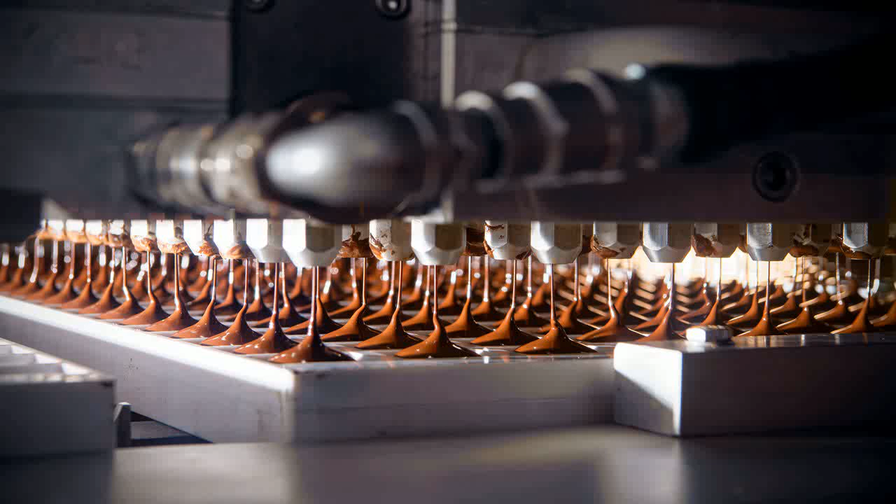Hello and welcome to the SKF webinar where we'd like to talk to you about managing lubrication in the food and beverage industry.

It's said that the 7 most expensive words in business are "we've always done it this way," and we feel that this can be applied to lubrication and relubrication within the food and beverage industry. We see the need for people to consider over-lubricating, increasingly relubricating machinery and assets, and this is largely due to the contaminating nature of the processes themselves, particularly regarding cleaning, high pressure rinses, and chemical cleaning for hygienic purposes that goes on within the food and beverage industry. This leads to what we would consider to be endemic over-lubrication.

So let's discuss the importance and the impact of lubrication. First of all, if we look at a typical maintenance budget, it's said that only between 1 and 3% of that budget is taken up by lubricants themselves. However, the lubrication act itself can have a very profound impact on company key performance indicators and on costs. It will impact output, it will impact cost, and it will impact compliance.

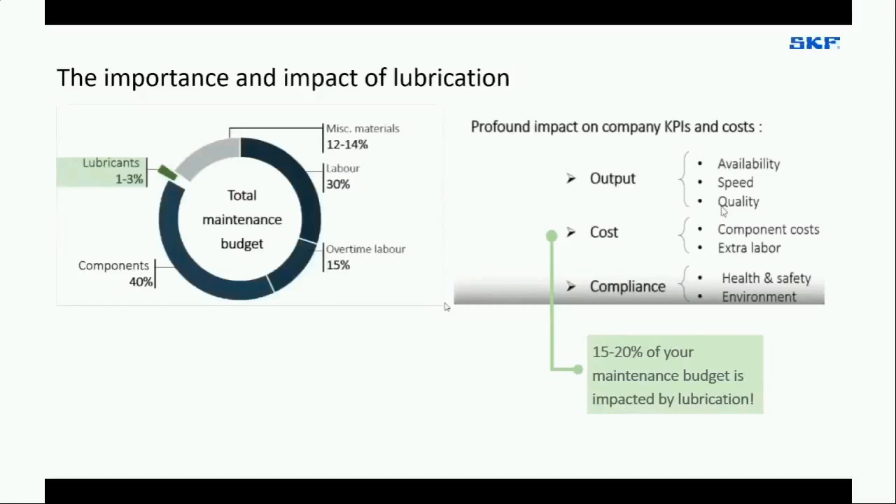If we look at just one of these facets in more detail, that is cost, the companies we work with, both globally and locally, tell us that probably between 15 and 20% of the typical maintenance budget can be impacted by lubrication and by poor lubrication practice. So let's look at this in a little more detail.

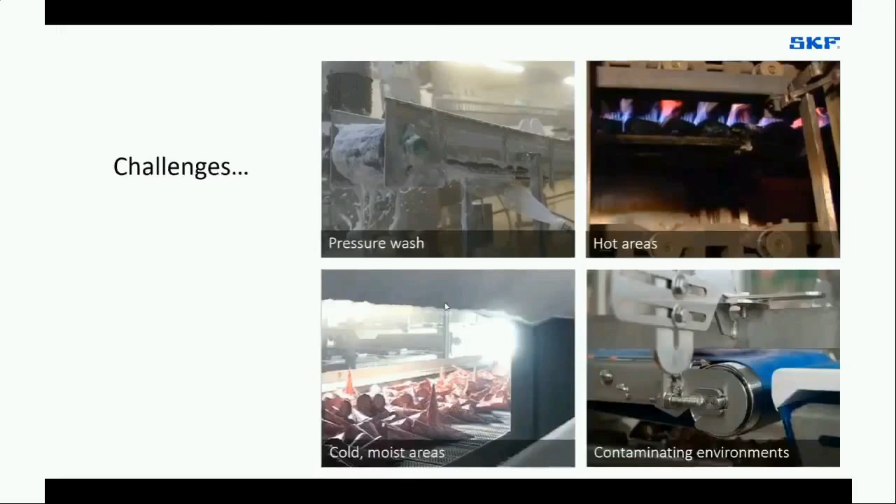What are the challenges? Why is lubrication such a big issue? That is really around the environments that we see within food and beverage production.

First of all, the cleaning that is necessary for hygienic purposes. This involves high pressure rinsing, the application of penetrative chemicals, which are actually solvents in nature, quite often used to dissolve fats, but that means they also impact on lubricants as well.

The application of heat in many of the processes—these can be temperatures of around 180 to 230 degrees centigrade in some cases, way beyond normal grease technology. This has a big impact on the relubrication process, the amount of relubrication being conducted.

Even cold areas where we remove heat, such as freezing applications, can have a big impact on the lubricant within a bearing, the need to relubricate, and the performance of the bearing itself. And pervading all of these environments are, of course, overall contaminating environments from the nature of the elements being used in the food manufacturing process.

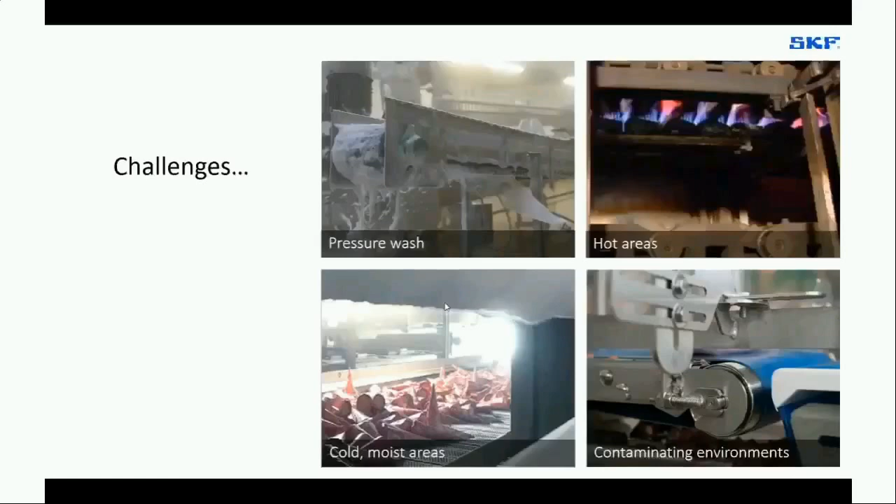So what is the best lubrication strategy? We look at it in 3 elements. First of all, we consider: is it possible, by the use of the correct technologies, to completely eliminate the need to relubricate bearings within rotating equipment?

If we still need to relubricate after that consideration, how do we minimise the amount of relubrication going on and the volume of lubricant used during that process? And finally, how can we optimise the relubrication process? How do we make it safe for people, for the environment, and for the product that's actually being manufactured?

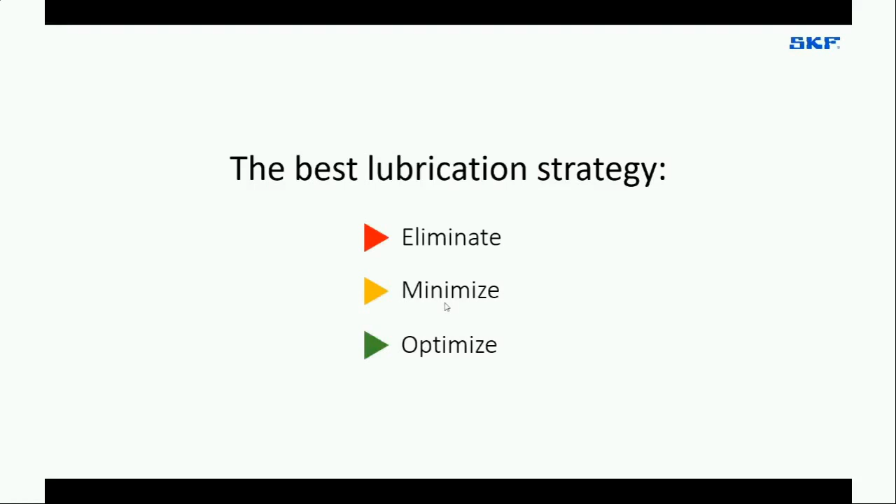So let's consider each of these in turn. First of all, eliminate. We would say to customers: we want to consider whether we can eliminate the need to relubricate, for example, ball bearing units on your conveyors.

And the response quite often is people look at you with panic in their eyes because they see how unclean the nature of the application is, how aggressive the cleaning involved in the hygienic processes are, and they say we have to re-grease the bearings. At least after a hygiene clean, we need to replenish the lubricant in the bearing because we know it will be impacted by the cleaning process.

So the washdown cycle in itself is often the root cause of over-lubrication. And it's a bit of a cycle, and it's very difficult to see how you can break out of that cycle. It's obviously necessary to hygienically clean manufacturing assets within the food and beverage industry. This is done by high pressure rinses, by the application of penetrative detergent solutions, and then further high pressure rinsing.

Because of that, people are often relubricating—as we would call it, relubricating to purge. So they're pumping grease into the bearing until the old dirty grease, and even water that's got into the bearing, is pushed back out. That in itself is a contaminating process.

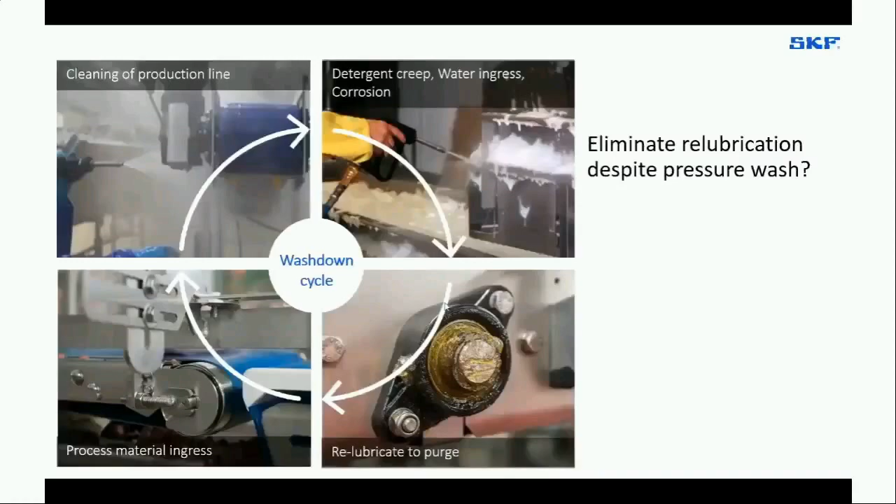So at this point, I'd like to hand over to my colleague, Fabio Falaschi. Fabio is very involved in the development of many of our food and beverage dedicated products, and he wants to go into much more detail about the mechanics of how these contaminants get into the bearing, how conventional sealing might be impacted by this, and then how sealing might be developed to better accommodate this contamination. So I'll hand you over to Fabio for the next few slides.

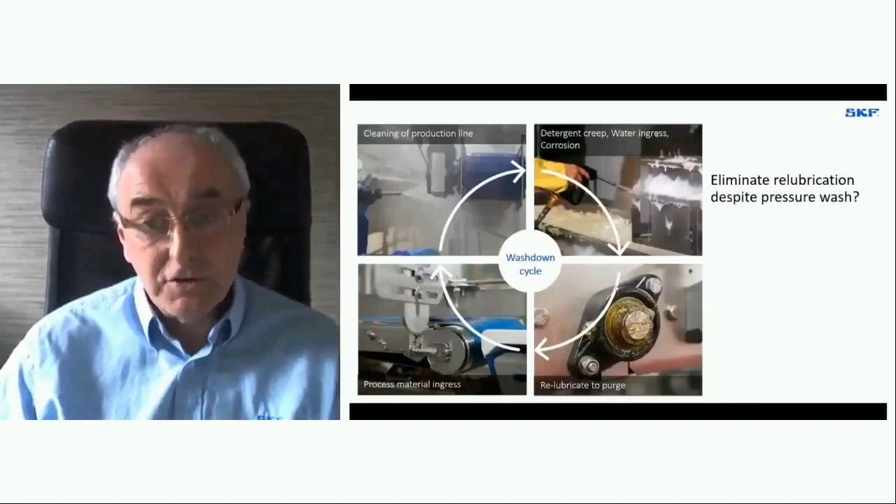Hello everyone, my name is Fabio Falaschi. I'm the Product Development Manager for Ball Bearing Unit in SKF. And today I want to talk about IP69. Is it really a safeguard?

IP69 is a very well-known and recognized certification on the market, and in fact we hear a number of customers asking about IP69 rating certification. Well, I'd like to bring you some insight from our test. So, first of all, let's take a pretty high-end bearing that is IP69 certified.

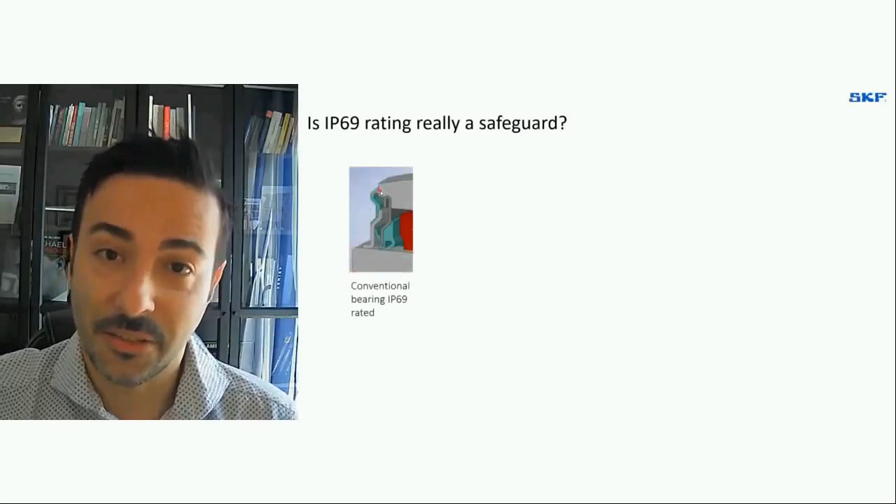Let's take also the test that we call the detergent droplet test, which we at SKF developed to try to replicate as much as possible what happens actually on the field when it comes to washing down with detergents. How does this test work? You see a little needle here, and this needle lets some detergent mixed with water drop into the bearing to see what happens to the bearing itself after this contamination. We run it at around 1000 RPM speed because this is an accelerated test, for a pretty long time - 500 hours. Then we want to check the status of each component after this test.

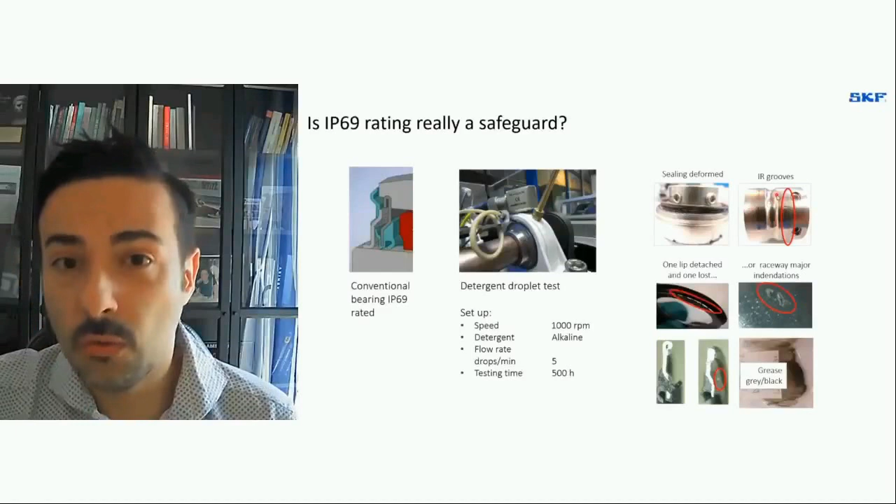Okay, so let's see together, one by one. Let's see the sealing. The sealing is very deformed, as you can see here, not really close, unfortunately, to the nice shape shown in the picture. And then we have these inner ring grooves here, made by these two contacting lips. The first time I saw this phenomenon happening, I was like, wow - I could not really believe that basically the rubber is able to machine hardened stainless steel. This is really incredible, but we have seen this over and over and over again, both in the field and in our test. This is really what happens when the lubrication in this area fails.

Then what else? We have the sealing system here, which has one lip completely detached, and the reason for that is that the detergent is so aggressive that it dissolves the bonding agent between the metallic shield and the rubber. And also, one lip is completely lost. I have no idea what happened here, but something really tough and strange happened to the sealing system.

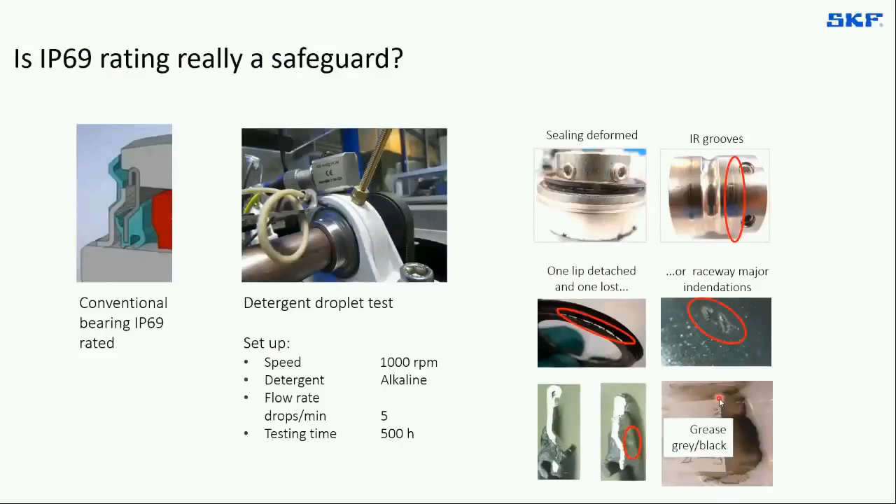Then we have the outer raceway here with major indentation, as you can see here. And I tell you, when you have indentation like this, the bearing life is not really much - there's not really much remaining bearing life here. And finally, the grease, which was originally white, is very oxidized, and you don't really want this kind of grease inside your bearing.

Okay, so what we can say here is that the IP69 rating, at best, is a safeguard against water. It's not a safeguard against detergent. Detergents are very aggressive and they trigger a completely different failure mode for the bearings.

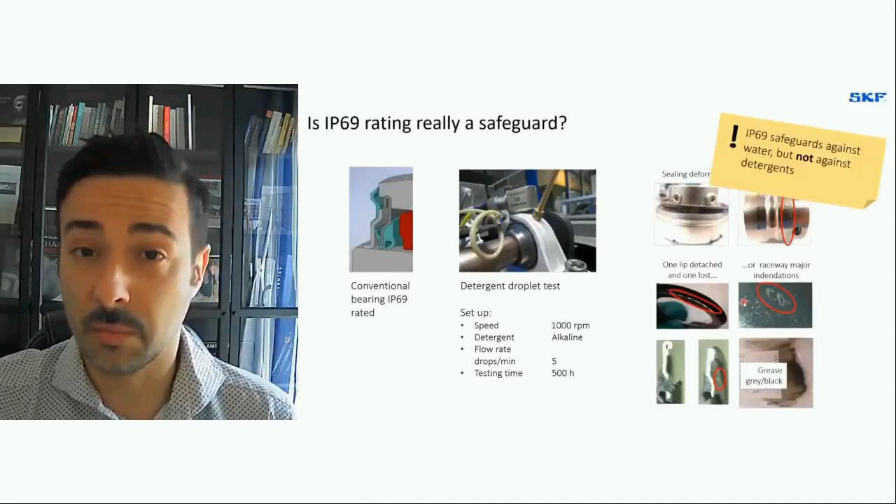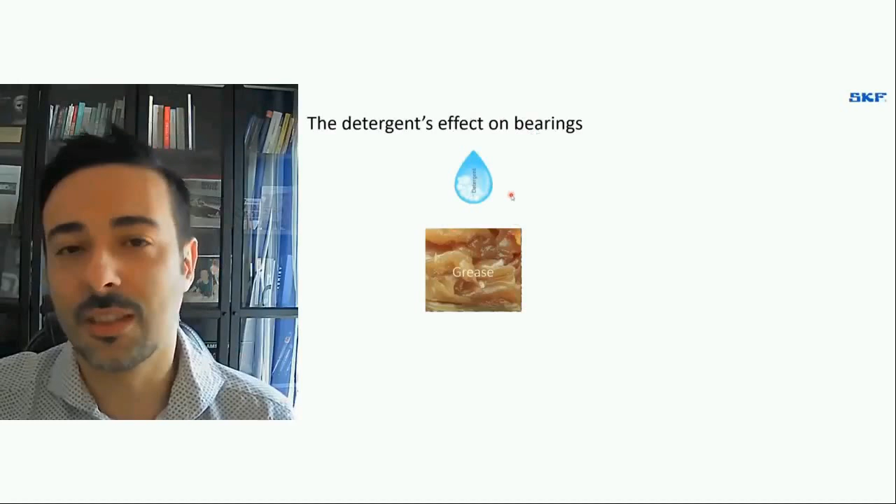So think about this. What the detergent is designed to do is wash down fats. And the grease, when it comes in contact with the detergent, does what it's designed to do: take the fat part, which is the oil, and separate it from the thickener.

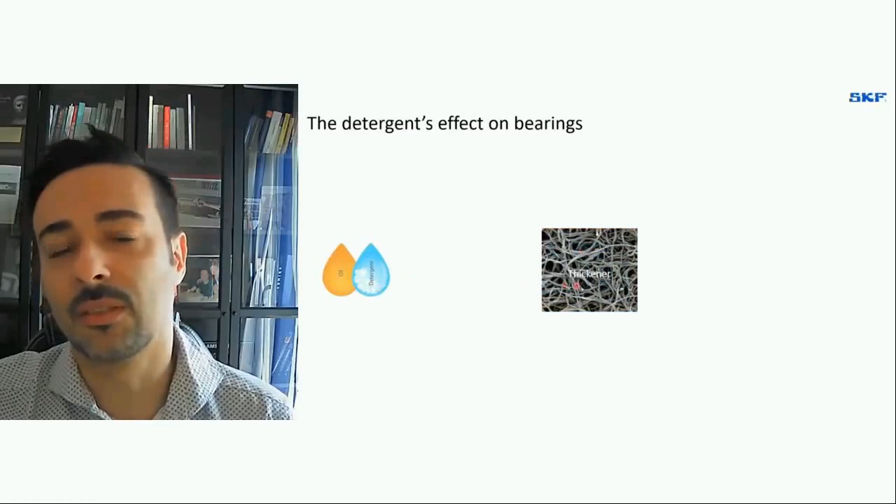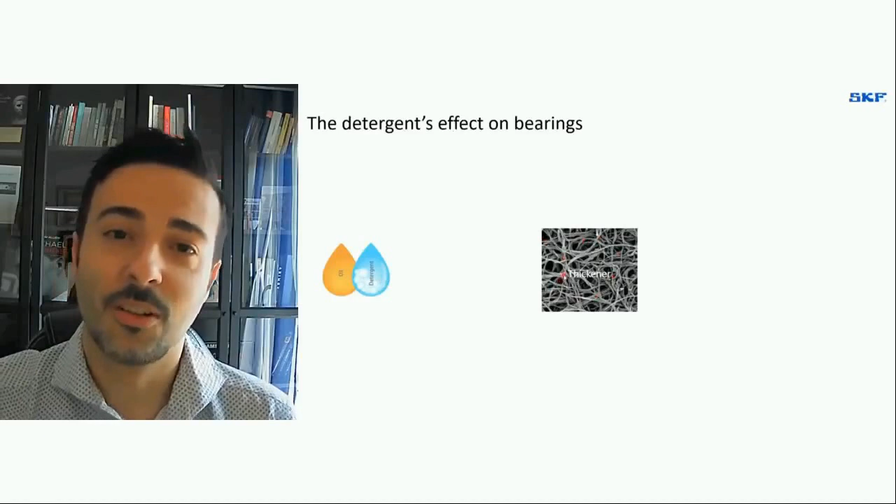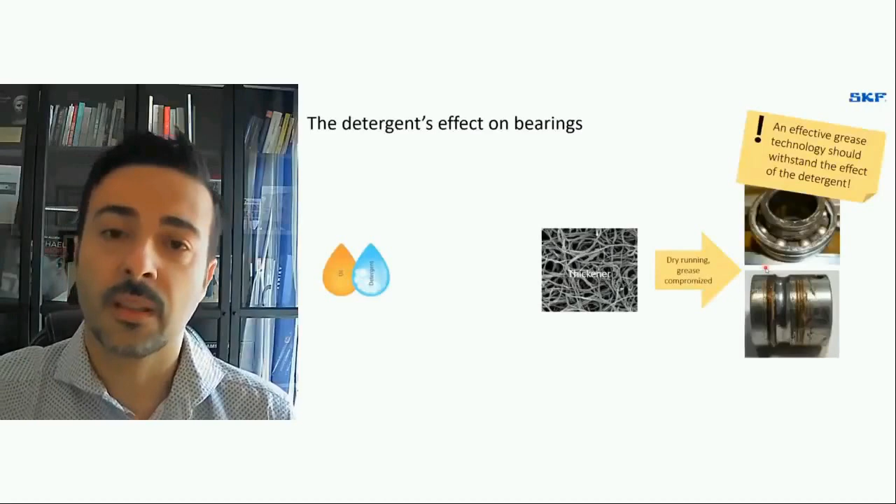Let's also speak about sealing technology. Let's take this solution with two contacting lips, one axial and one radial. And here we have a drop of detergent mixed with water.

Now the detergent is designed not only to wash down fat, but also to go through everything. This is the reason why the detergent has such a low surface tension. This low surface tension is the reason why you cannot in any way avoid the detergent going through your contacting lips. No matter how many you put, sooner or later, much sooner than later in my experience, the detergent will go through. So let's see what happens.

When this comes through the sealing system, it will get in contact with the grease. As we've seen before, the thickener and the oil will be separated, and you will have this sealing lip running dry. This will increase the friction, increase the temperature, and increase the wear of the sealing lip.

The only thing that will decrease will be the bearing life. So usually the standard perceived fix for this is you take your pump and you pump fresh new grease here. Doing that, you basically pump out the exhausted grease and you have fresh new grease here. Fine?

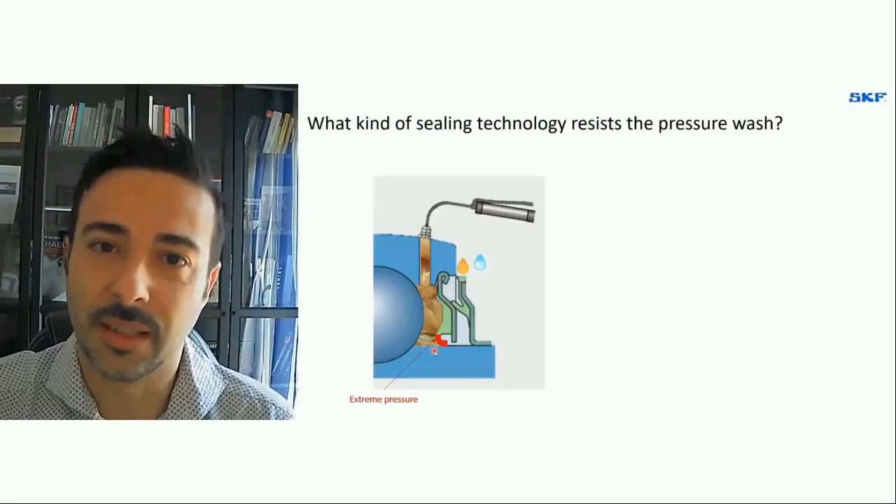Here you will have extreme pressure because this pumping procedure creates extreme pressure, and there's no way that after the procedure is over you can assess if this lip is still working properly or has been damaged. You just cross your fingers and hope that this will work. Is it really the best solution that we can have here?

Well, let's have a look at this. This is our SKF patented gutter sealing system. And we knew, as I told you, that there is no way you can avoid this detergent going inside, because it's designed to do that.

When you cannot actually avoid it, we say, okay, if you cannot beat them, join them. So let's try to use the same characteristic that is annoying, the low surface tension, and take advantage of it. Let's have a look at this animation.

This is the section of our gutter sealing system. Let's suppose you wash down with high pressure water and detergent as you do in the field. The majority will be kept outside the bearing, but some drops will go inside—we knew that since the beginning when we designed this. What happens is this will be collected by these gutters, just as it happens in your house with the rain and the gutter collecting it. This is the same concept.

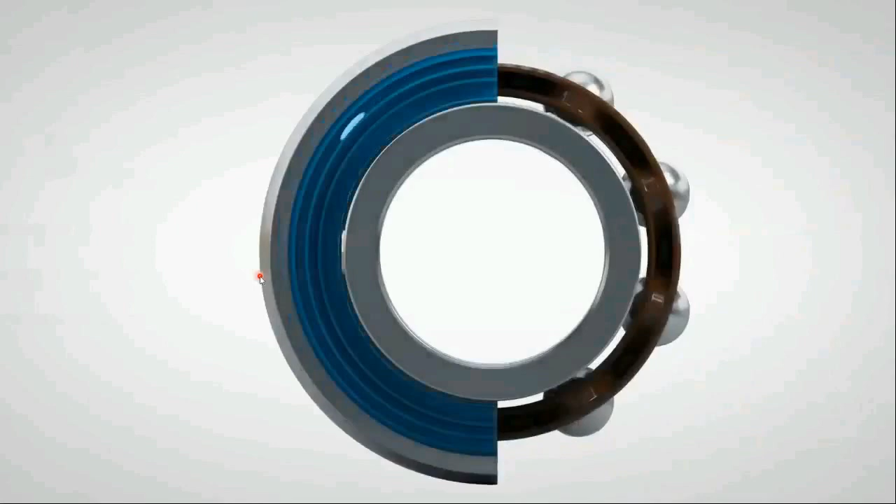And thanks to the low surface tension, this will be easily driven to the outside of the bearing, either by gravity, or if the bearing is rotating, even better, thanks to the centrifugal effect.

So, develop innovative technologies that work with the prevailing water and detergent mixes applied, as opposed to those that just try to fight them. If you know you cannot win, you shouldn't even play that game. And here it's the same: if you cannot avoid the detergent coming inside your bearing through any contacting lip, then you should not even have that contacting lip, and you should approach it in a different way. This is what we did.

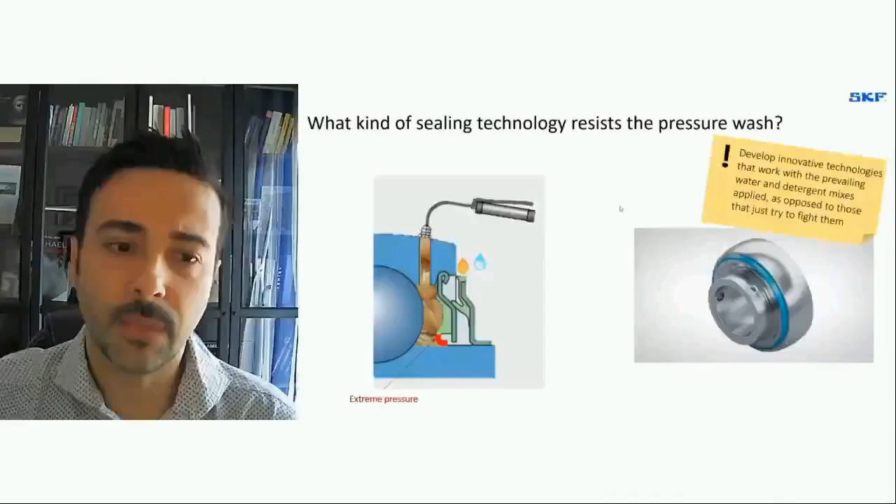So let's have a look at this.

This is a washing down procedure from the front of the bearing, and this is a real picture coming from the field about what is inside one of the covers. After you wash down, I think everything is cleaned and shining, and this is really scaring when it comes to food safety.

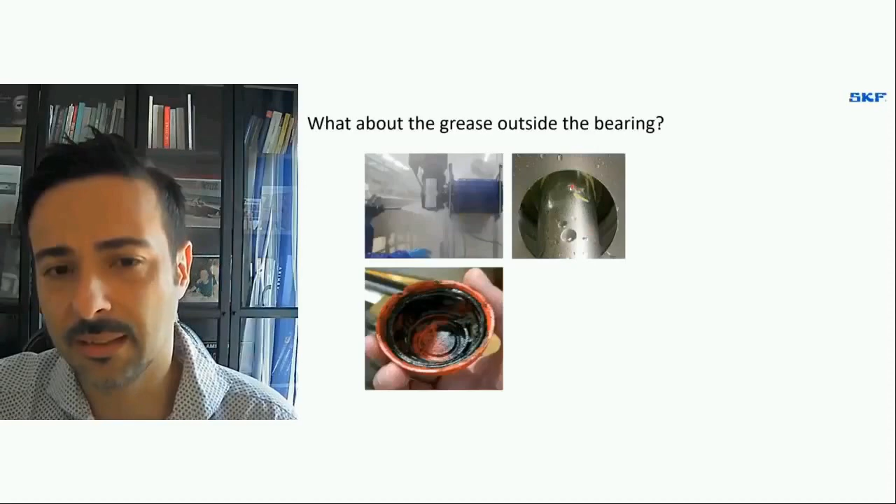And pretty the same is happening from the back side. When you have a flanged unit like this, you have this through hole for the shaft, and everything can go through. I want also to talk about this.

This is the so-called standoff solution, in which you basically separate the bearing unit from the frame. I want to share this with you. We made an independent washdown test by a microbiology and hygiene expert at RISE, Research Institute of Sweden, who compared the cleanability of standoff with the ones mounted on the frame with the base seal solution. I advise you to watch it yourself on YouTube. But anyway, the conclusion is that the food residues are still present.

We can see here, if you zoom, these are food residues. Can you clean them? Maybe yes, maybe you can do better than this, but in the real world, when you have to put attention on this when everything else looks fine, do we really want to take this risk? Is it really the best solution possible?

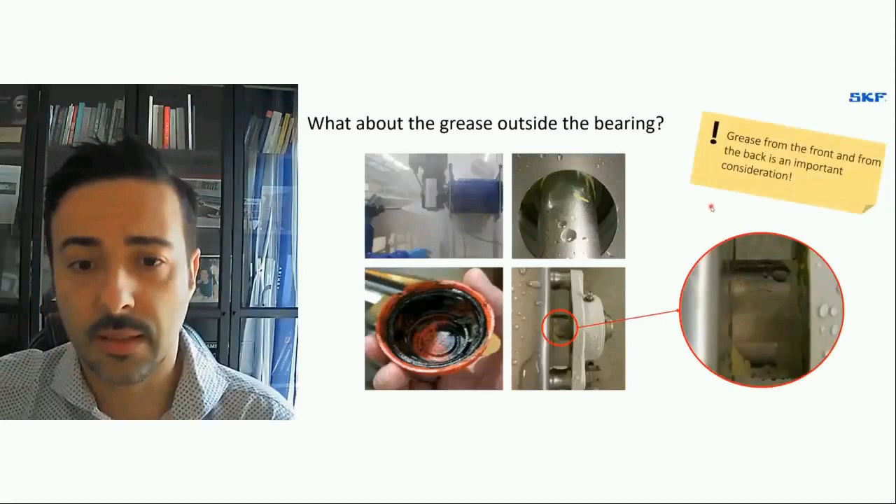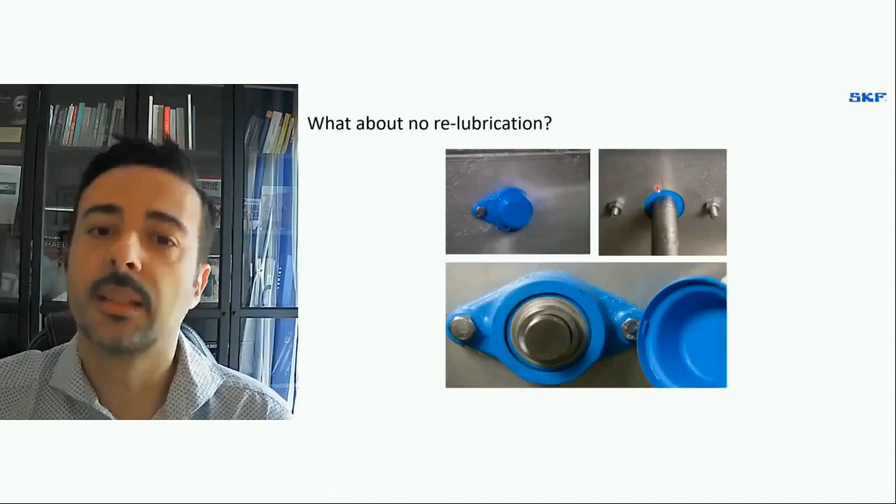So grease from the front and from the back is an important consideration, as well as food residues. This is what we developed at SKF, a solution which is sealed from the front side, thanks to this innovative and reliable anchorage and sealing implemented in our end cover, and also the combination of the base seal solution, which is a unique feature on the market worldwide, together with our back seal. This creates a very, very effective sealing from both the front and the back of the unit.

So thank you very much for your attention.

So thank you, Fabio. I'm sure you will agree, fascinating insights there from Fabio.

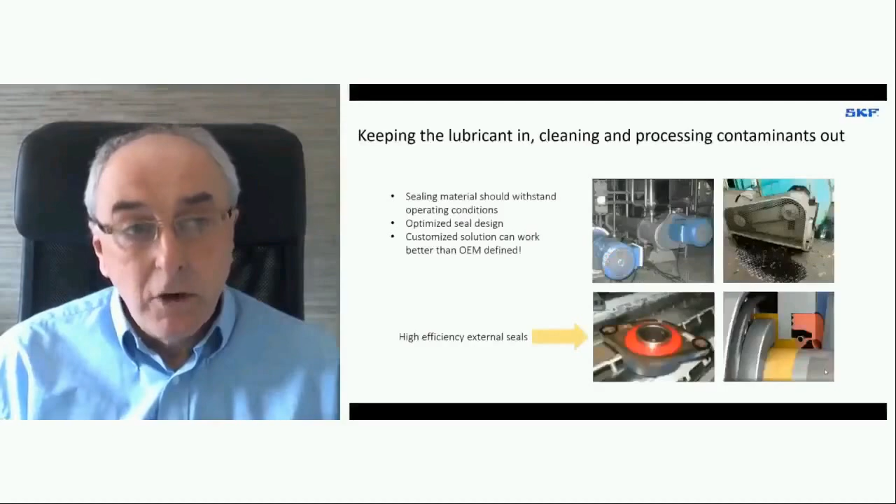So moving on, just quickly touching upon the need to keep the lubricant within the bearing, and from a sealing perspective, keeping cleaning and processing contaminants out.

Sealing materials should really be able to withstand the operating conditions, so the materials, the design itself should be optimized. If there are particular requirements for the seal, it should be built into the design, whether that may be something like lip profiles, ability to withstand certain environments, etc.

And customized solutions. If we're able to customize solutions, build the sealing component, for example, into a plastic holding element, a customized solution can often work better than one that is defined by the original equipment manufacturer. We frequently work with end users to develop, manufacture and apply high efficiency external sealing.

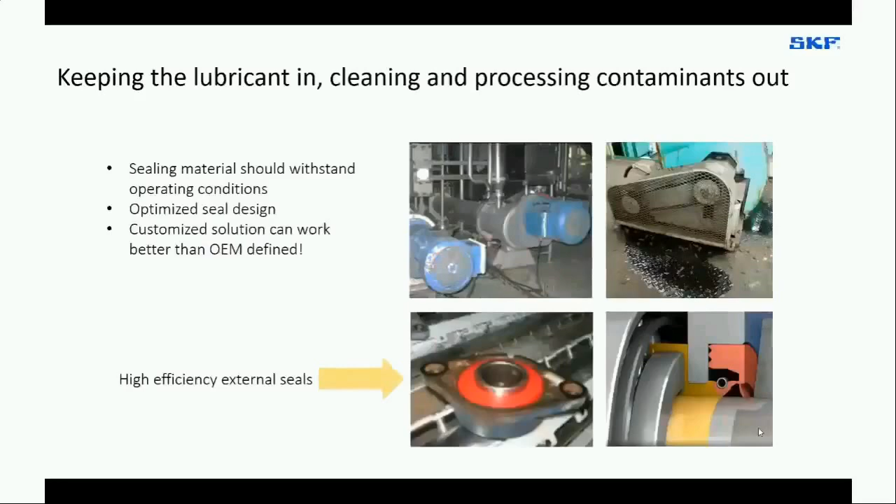So, eliminate relubrication despite pressure wash. We've touched on this already. With the right sealing, the right lubrication technology, and the right sealability of the insert bearing—that's the bearing unit itself and the sealing surrounding the bearing—you can improve reliability.

You can significantly improve reliability quite often. That will reduce the amount of bearing units that are being changed and reduce the amount of time that's taken to change them. The net result of that is better availability, more production.

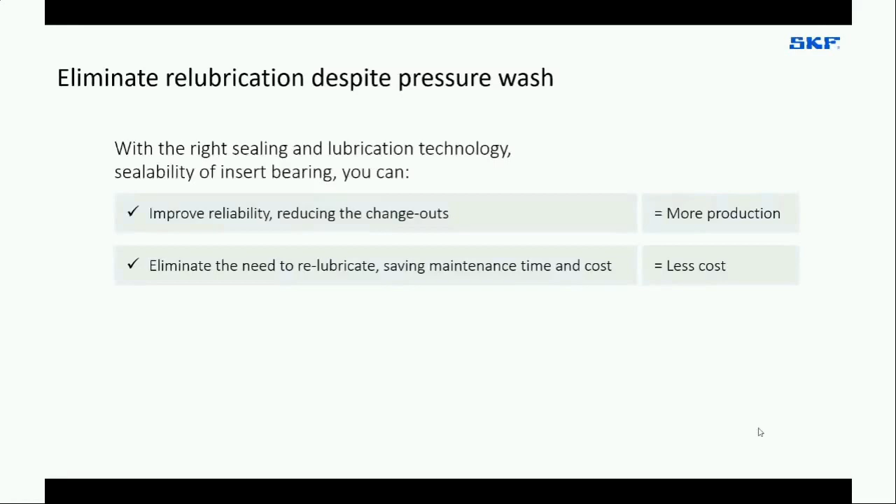You can eliminate the need to relubricate. That's saving maintenance time and cost, an overall cost reduction from the maintenance budget. You can reduce the effect of grease in the wastewater stream, for example, so there is less impact on the environment. And you can most certainly improve food safety.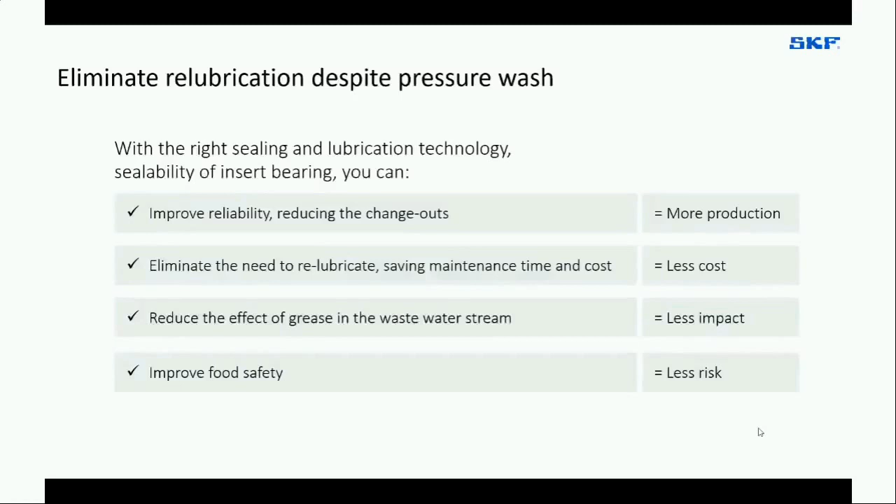Because there is less excess lubricant in and around the bearing, there is less risk of contamination of the food product. In these days of ever increasing food recalls caused by contamination, and the risk to the business from a reputation or cost perspective, protecting food safety is paramount for many of our customers in the food and beverage production industry.

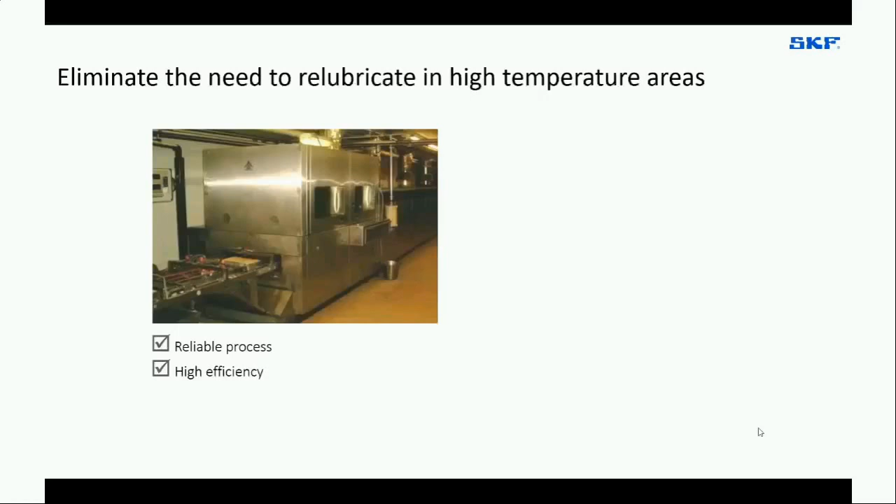So when we look at such applications, and the image you can see here is a wafer oven production unit for the confectionery industry, when we go and see a customer like this, we might well be told by them that actually we're quite happy, that we have a relatively reliable process, that we manage to achieve the efficiencies we expect to achieve. We don't really feel that we have any problems.

But when you start to look at the application in more detail, to understand the process, understand that there's a lot of oxidation going on, that there's a lot of maintenance activities of various kinds needed to achieve this reliability, then you can begin to understand that in order to get reliability, there is frequent and very expensive maintenance going on, there is a lot of planned and a little bit of unplanned downtime being incurred, and there is a limit to the ability to change production.

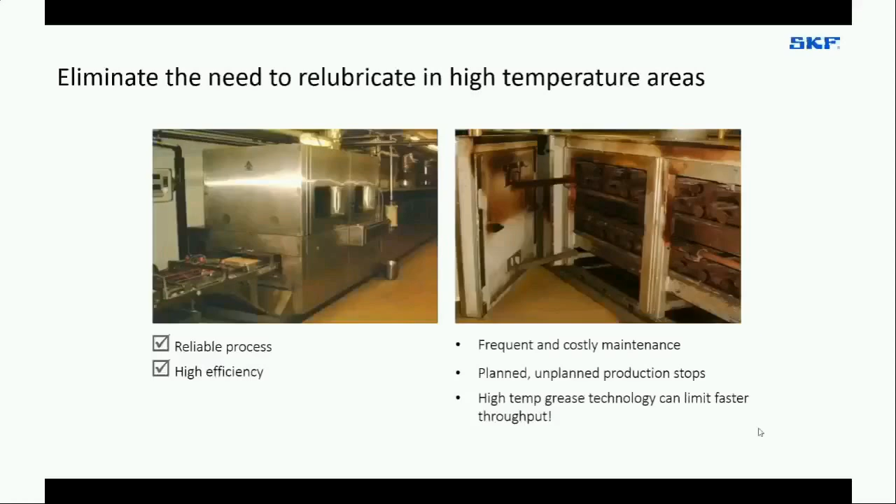The grease technology in itself means that you can't get to higher temperatures. Therefore, you can't perhaps increase the speed of the oven and increase the temperature to achieve the same result and increase production. It is a bar to being able to do that.

So we very often and frequently move to look to graphite technology for our bearings in high temperature applications. The ability of the bearings having, for example, a graphite cage, the graphite being a sacrificial lubricant, it wears very, very slowly through the life of the bearing, and would enable process temperatures of up to 350 degrees centigrade.

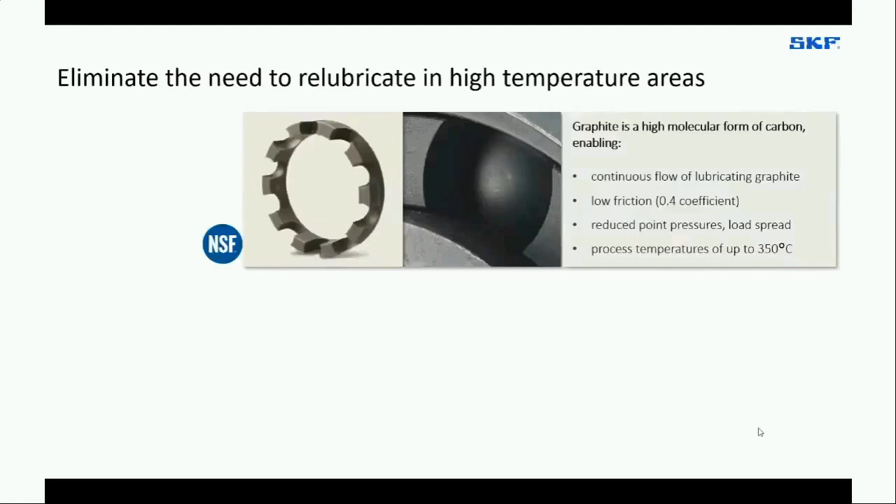Obviously, we really don't see those temperatures in food production. As said already in the preceding slide, maybe sort of 230, maybe even 240 degrees C. But at those temperatures, these bearings will run quite happily and without problem and give a long, reliable life.

So by applying this technology, you can eliminate the need to re-lubricate even at very elevated temperatures. There is a significant saving in terms of the cost of the high temperature grease in itself and a reduction in the maintenance downtime needed to either re-lubricate bearings or change bearings. So that has a net impact of less cost from the maintenance budget.

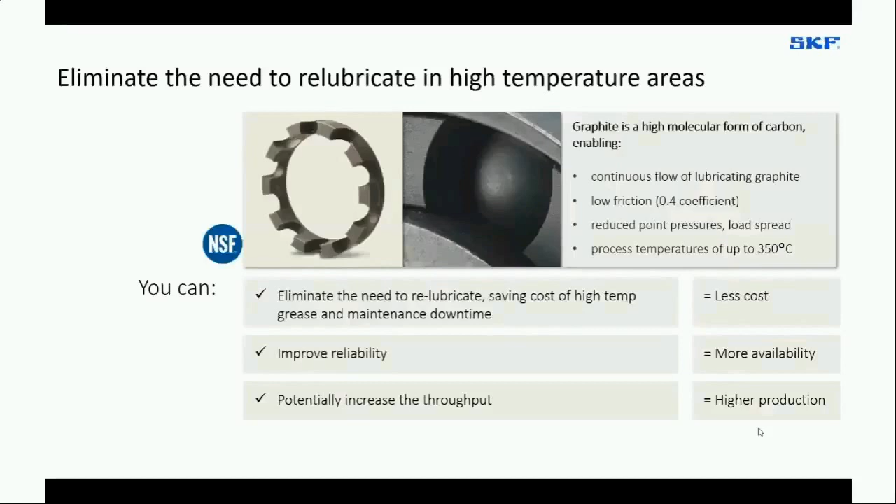You can significantly improve reliability, thereby less planned activity, less planned maintenance, more availability of the production equipment. You have the potential to increase throughput. You can increase operating temperatures. You can potentially increase the speed of the oven. So that would lead to higher production, better profitability.

And you will improve operator safety. There's less maintenance required, less invasive maintenance to do on potentially hot equipment. So this will have an impact on operator safety as well. A number of benefits here.

Overall, in high temperature areas, please consider graphite-based lubrication technology, particularly in deep groove ball bearings or even bespoke designed units.

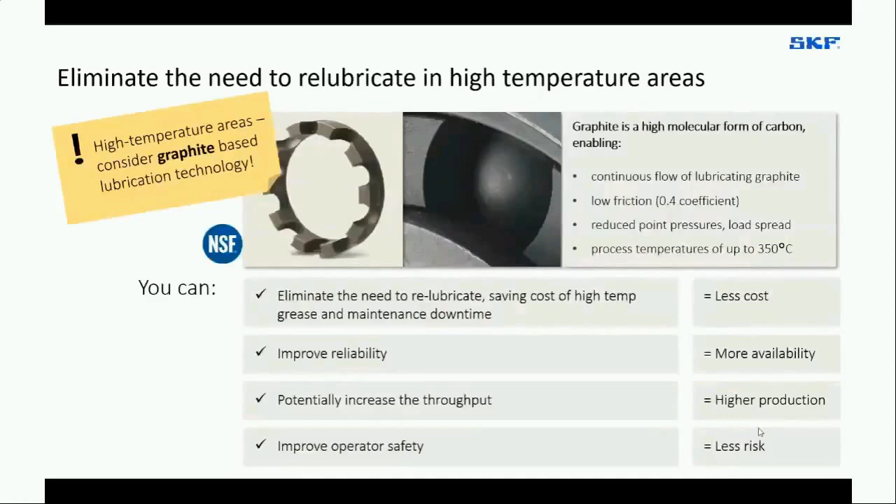When a hygiene clean goes on, higher temperature water is brought into the freezer to begin the cleaning process. So temperatures of maybe minus 40 degrees centigrade will start to increase, and will increase relatively quickly. As the warm water starts to be applied in the cleaning process, the temperature will change from minus 40 to maybe plus 25, plus 30 degrees centigrade. There's a lot of air in the grease in the bearings that expands.

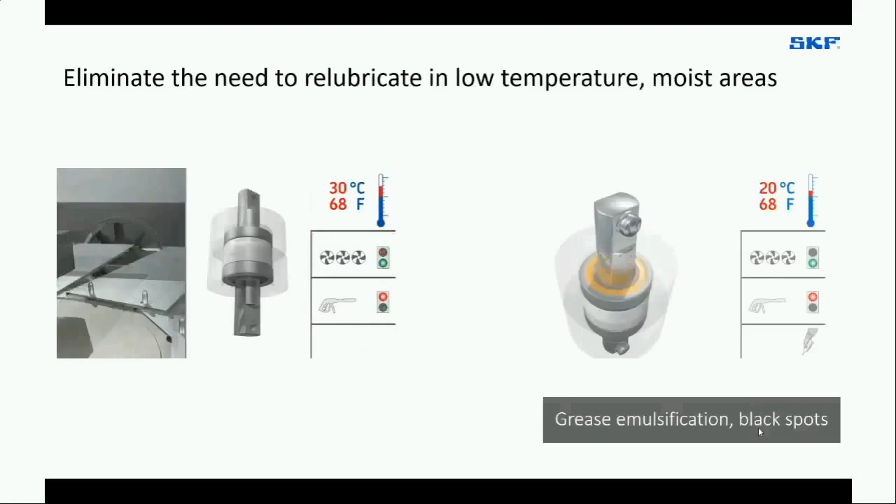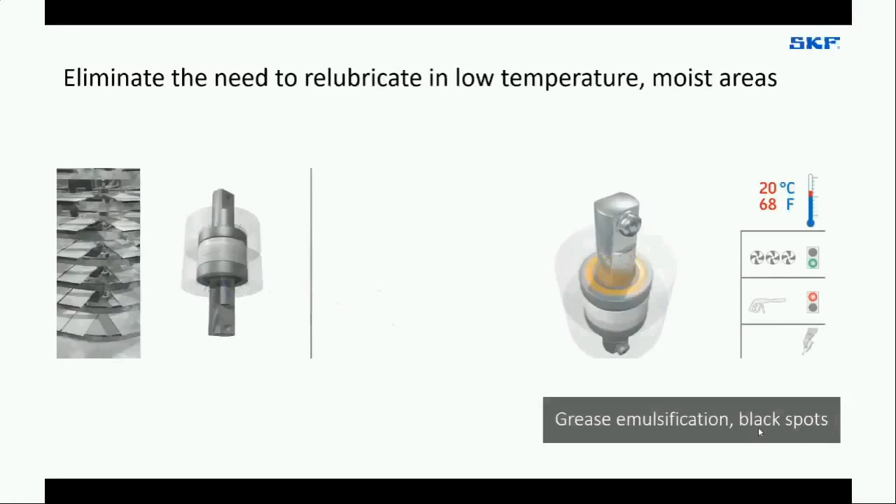Then once the cleaning has been done, the freezer is plunged back down to temperature very quickly. So the temperature goes from maybe plus 20, plus 30, down to maybe minus 40. And the moist air is sucked back into the bearing. That's something called breathing. Within a bearing, it will lead to corrosion, the risk of grease contamination, the potential emulsification of the grease, and in some cases, even ring fractures in bearings, most definitely impacting on reliability.

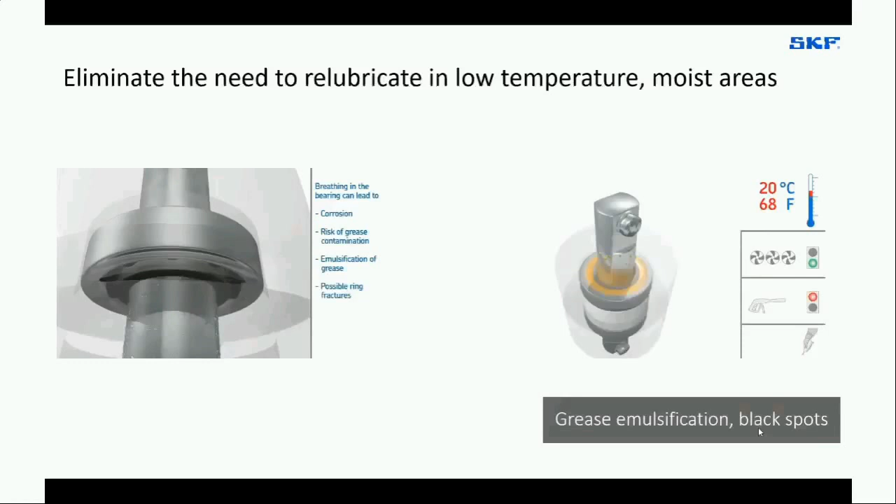The other issue, if you look to the animation on the right-hand side here, is that during this process, small amounts of lubricant are potentially released. Because of the blast from the freezing air being moved, they spread around the freezer, drop onto product, causing something called black spot. So the grease emulsification, the breakdown of the grease escaping from the bearing results in contamination of the product, and it's quite often described in this way as a black spot.

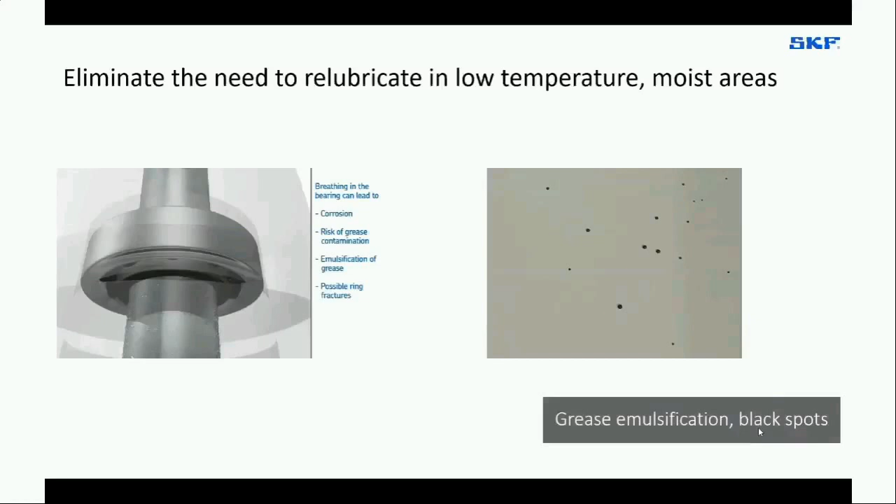So how do we eliminate potentially the need to relubricate in these low temperature and contaminating areas, given that we see the emulsification of the grease with water? We quite often apply alternative lubricant technologies to such applications, and illustrated here is an SKF development which is called solid oil. Solid oil, as opposed to a conventional grease, is a polymer which is saturated in oil.

As it releases the oil, that acts as the lubricant. If you look at the image on the left-hand side, the first test tube shows you a typical grease, and within that grease there's a lot of air. There's a thickener which holds the oil, as described previously, but the oil content is only about 35% of the total volume, and that's the amount of lubrication available for the bearing.

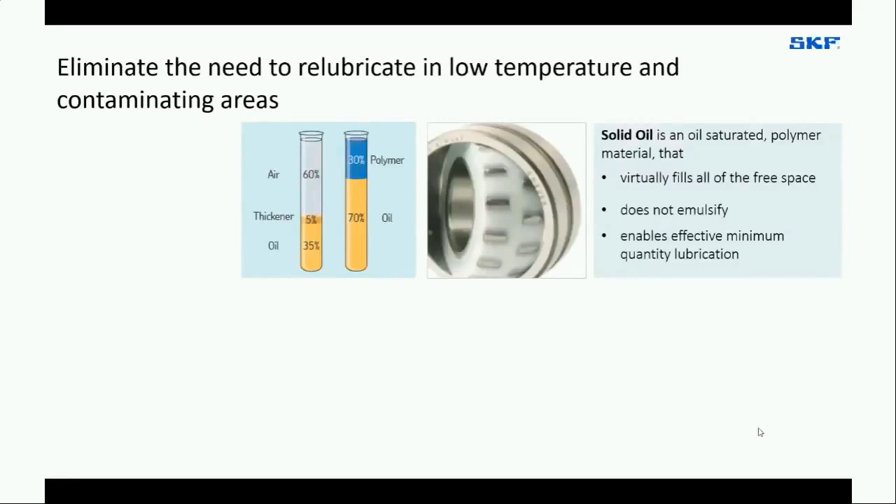If we look at solid oil, which is the test tube to the right, the holding matrix is polymer, and because there's no air in there, about 70% of that volume is filled by oil. So more than twice the amount of oil is available as a lubricant with solid oil compared to grease.

So solid oil is an oil-saturated polymer material that virtually fills all of the free space within the bearing. It doesn't emulsify in the presence of water. It's resistant to most chemicals, it's chemically inert, and it enables effective minimum quantity lubrication. There is more oil available to lubricate the bearing than if you had a grease-filled unit.

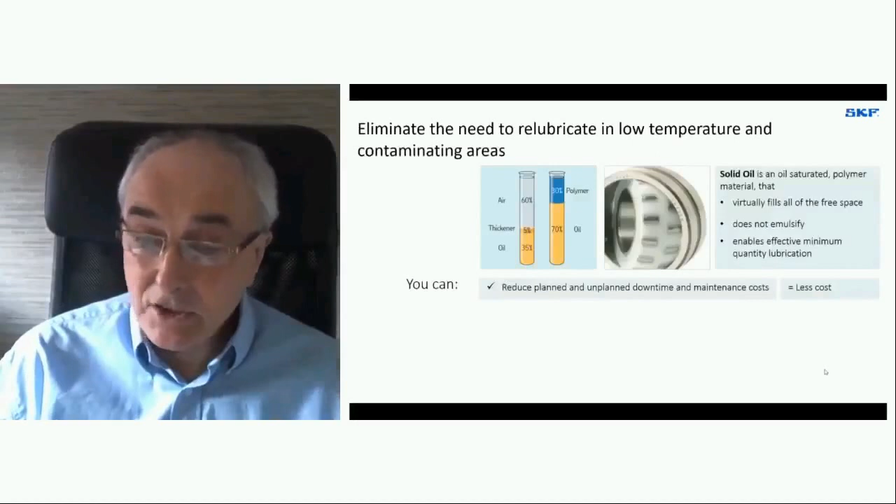So therefore you can reduce planned and unplanned downtime, and therefore maintenance cost. That takes excess cost out of a maintenance budget. You can improve reliability, which reduces the effect of cleaning and the processing environments, and again, improving availability of assets. You can improve operator safety, so there's less risk.

If any of you have ever worked in a freezer environment and had to go into a freezer at very low temperatures, you'll know that it's a very uncomfortable process, and certainly you wouldn't want to be going in there too quickly to do any maintenance. So there are safety issues involved. And there's a reduced waste of grease and clean-up in terms of disposal of that grease, which is much better for the environment as well.

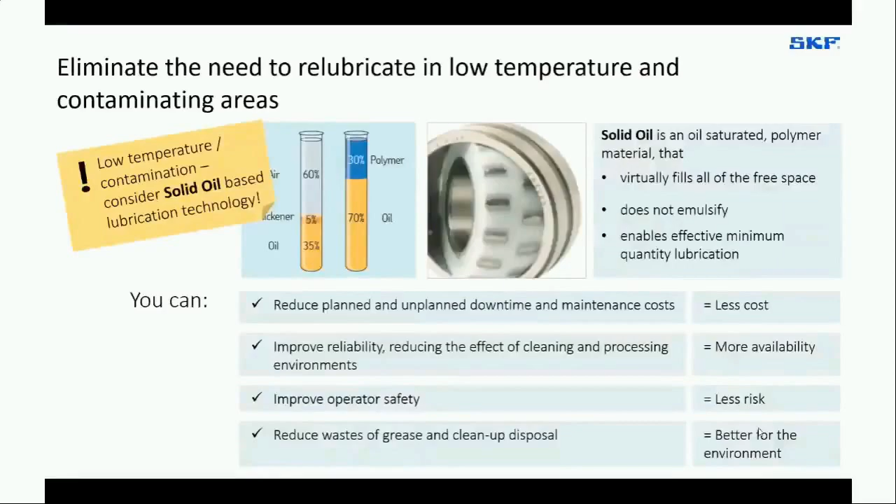So in conclusion, in low temperature and contaminated environments, consider solid oil - consider a low temperature, food grade, solid oil based lubrication technology. The next thing I'd like to discuss with you is minimizing lubrication.

We've talked already about the over-lubrication issue within the food and beverage industry, the grease to purge, and we've talked a little bit about how we might eliminate the need to re-lubricate. But obviously there are applications where we do still have to re-lubricate bearings. So how might it be possible to reduce the amount of lubricant we apply to the bearing, and how might it be possible to reduce the number of times that we re-lubricate a bearing?

So first of all, over-lubrication. We've talked about greasing to purge, we've talked about over-lubrication, and this is prevalent and endemic even within the food and beverage industry. We believe that over 75% of all bearings and chains and such applications are over-lubricated, in the mistaken belief that this safeguards reliability, when the reality is that it actually decreases reliability. It actually introduces many more problems than it solves.

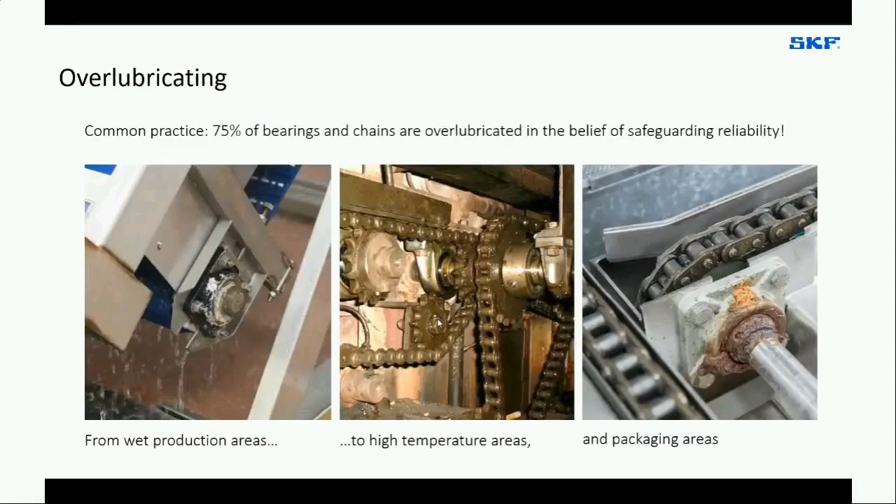So we see in wet production areas, people greasing to purge, to push the excess grease, the dirty grease, the water, the product back out of the bearing. In high temperature areas, we see people feeling the need to re-lubricate very frequently because the grease is aging prematurely. And even in packaging areas, we see people feeling the need to grease and to over-lubricate as well.

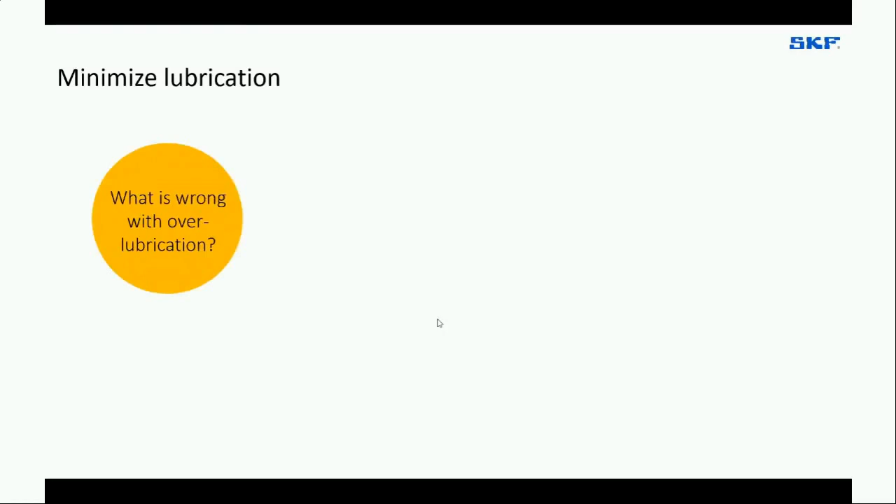So, in minimizing lubrication, people ask, well, actually, what is wrong with putting a little bit of extra grease into a bearing? What is wrong with re-lubricating a bearing more frequently than perhaps it requires? Extra grease in the bearing can only do the bearing good. Well, the reality is that it, without doubt, puts reliability at risk.

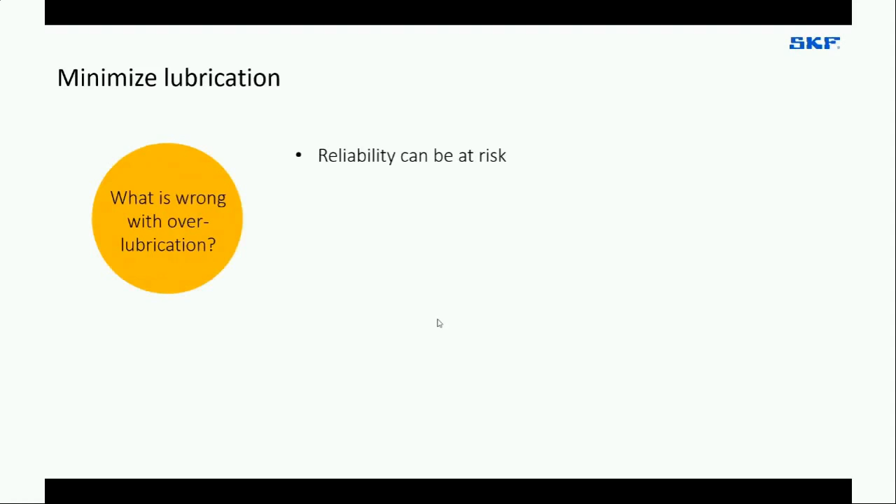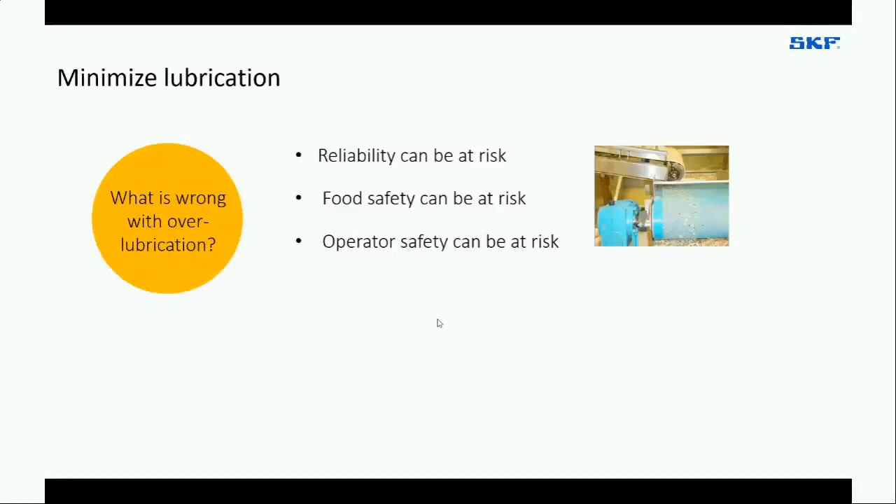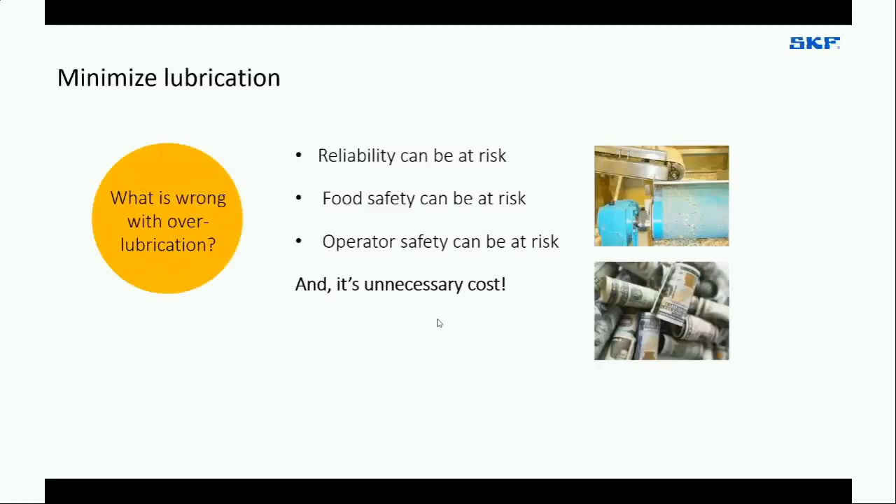Food safety, because of excess or leaking grease, could definitely be compromised. Operator safety can also be at risk because there's an increased need for maintenance, more people on or around the machine trying to access grease replenishment points. And overall, it's an unnecessary cost, impacting the maintenance budget. If it can be reduced, it takes away from the pressures and stresses on a typical maintenance budget.

So how do we do it differently? We work with many customers to try and minimise the lubrication, minimise the re-lubrication process. This starts with a review of current planned maintenance activities around lubrication. Sometimes that might just be the operator greasing as he sees need at the machine, or it might be a planned maintenance activity whereby at set intervals you go to the machine and re-lubricate with a set amount of lubricant.

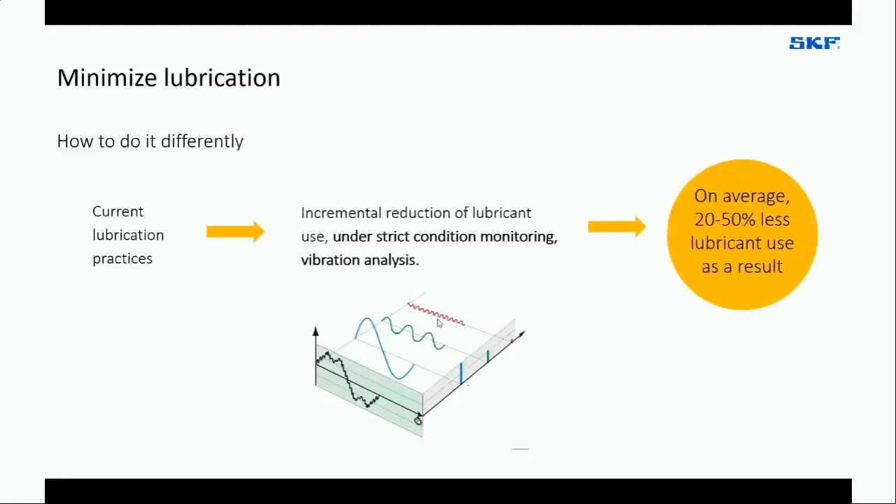So we would talk to customers about beginning an incremental reduction of lubricant use, under strict condition-based monitoring. That could be vibration analysis, visual analysis, or grease condition analysis. Under those conditions, and understanding them, we incrementally reduce the amount of grease and the frequency of the re-lubrication process. Through this practice, we typically see an average of 20 to 50% less lubricant used.

Optimizing lubrication is really where we consider how best to deliver lubricant to the bearing. We've already talked about reducing the amount and frequency of re-lubrication. But the reality is the best way to lubricate a bearing is little and often. That just isn't practical if you're doing it manually. So how else can we consider lubrication optimization?

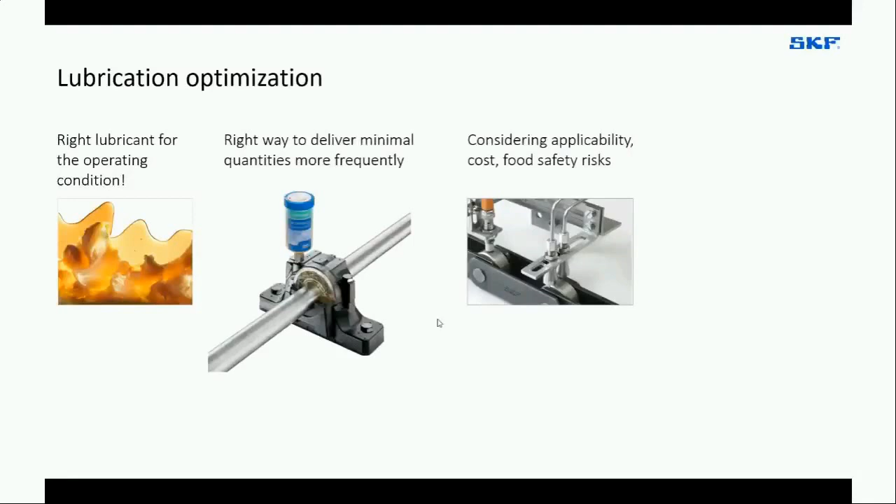To begin with, we need to understand the requirements of the lubricant and select the right one for the typical operating condition. We then need to identify the right way to deliver that minimal quantity, much more frequently. We need to consider the application of this technology, the cost of introducing it, and the potential risk to food safety in using that delivery method. So we measure, understand, learn, and then optimize how we're delivering lubricant and how we can improve the frequency of delivering very small amounts.

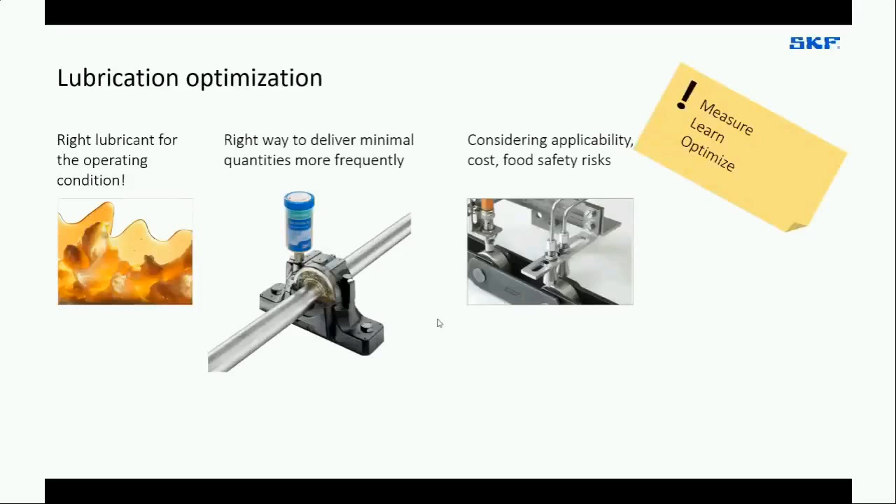One of the ways we do this is by understanding the needs of the lubricant, and how to deliver it if we're lubricating manually - how often, how much - and having the knowledge and right skills to do this.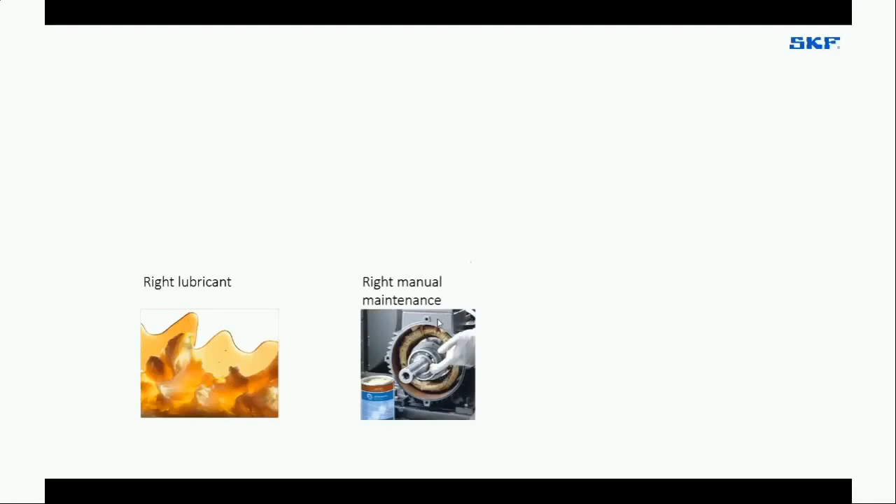Training is a big part of this as well, because what we tend to see is that if people are lubricating manually, they don't really understand how lubrication is used. There's a really big lack of understanding of lubrication itself, which leads to bad practice when lubricating manually. If we do have to re-lubricate, we should consider trying to automate the re-lubrication process, enabling us to deliver the lubricant in the best way - little and often.

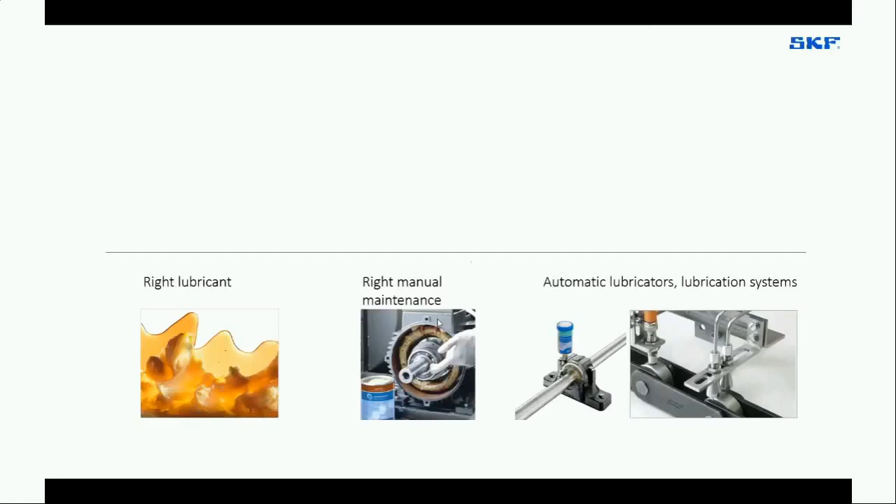As we've already talked about, consider the many re-lubrication-free technologies available to you today. Fabio has talked at length about the sealing technology incorporated into our ball bearing units. I've talked about high temperature applications and how graphite can take away the need to re-lubricate, and about low temperature applications with a low temperature food grade solid oil which doesn't emulsify in the presence of water, having a large reservoir of oil that lets you lubricate the bearing over longer periods.

There's also re-lubrication-free chain for such applications, and finally, high efficiency seals to protect the inside of the bearing. There's a lot of capability out there - the ability to manufacture and machine seals from thermoplastics to a set design and size, specially selecting the material and lip profiles to give you the maximum efficiency for sealing in and around the bearing.

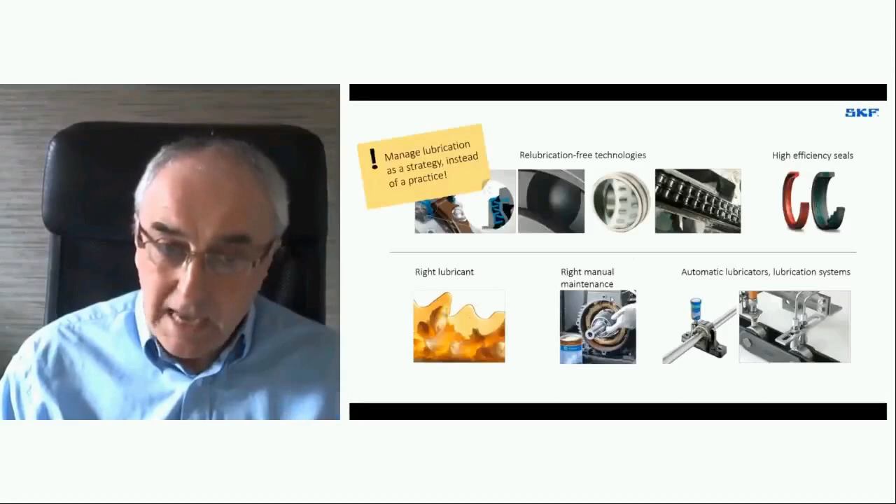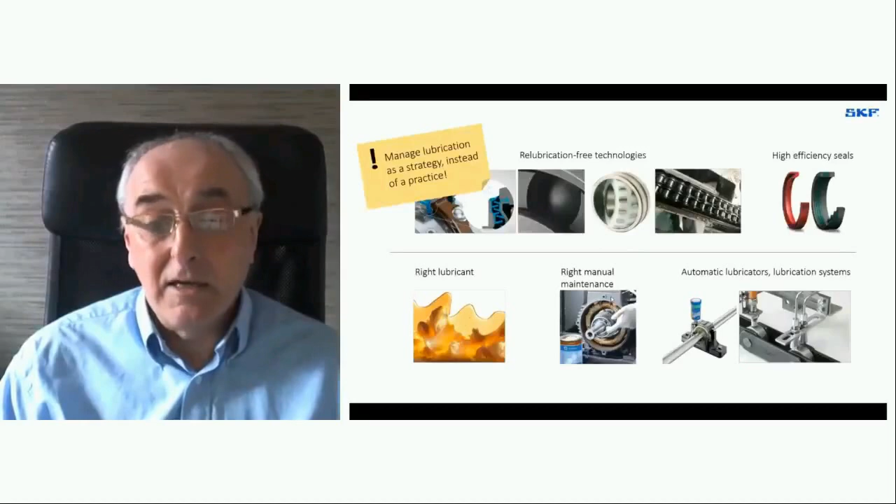So let's manage lubrication. Let's consider this and put a strategy in place, looking at how we might manually lubricate the bearing, how we might automate that lubrication, how we might eliminate re-lubrication completely, and how we can seal away contaminants from the outside of the bearing and keep the lubricant in.

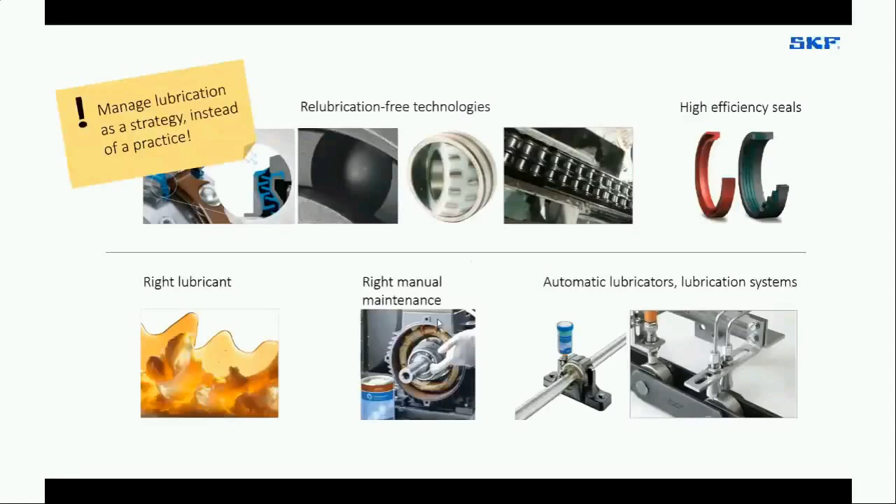Managing lubrication as a strategy, instead of just going out there and saying, relubricate this bearing after 2 weeks with X number of grams of grease.

So now you may be asking, well, how do we deploy this? How do we bring all of this together?

We conduct many technical assessments with our customers. This involves a very detailed line walk with somebody who has good knowledge of maintenance practice and the operation of a particular asset or line. Standing by the machine, talking to that person, we can identify solutions to issues as they're reported to us, as they're seen by us. We can identify simple fixes and quick gains.

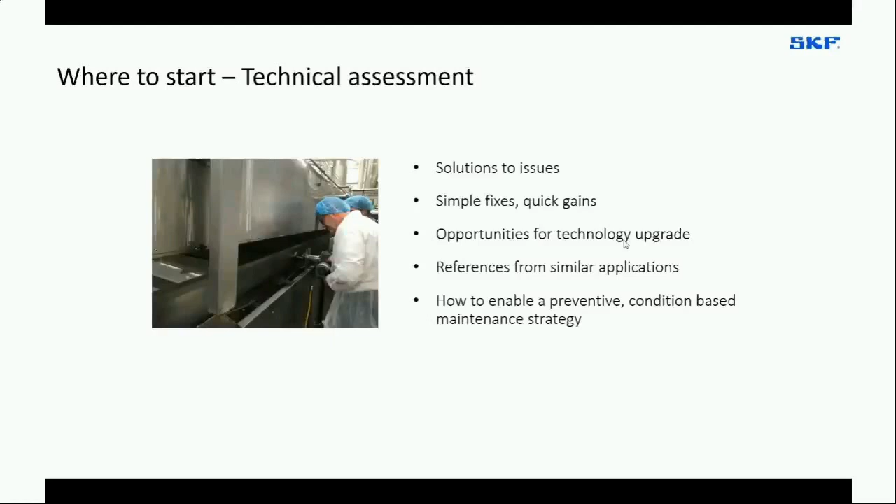We can see and identify and report opportunities for potential technology upgrades. We can then support that with references from similar applications where we've had successes previously, and support enabling a move to perhaps a more preventative, maybe condition-based maintenance strategy as well.

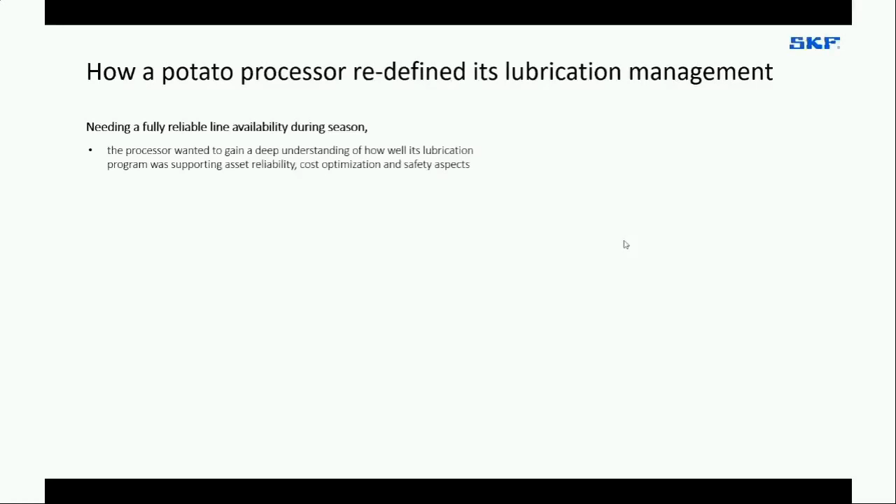This is an example of a customer of SKF's, a potato processor, and how with SKF's help he redefined his lubrication management. He was in need of a line that was completely reliable during the potato season. He wanted to try and better understand how well his current lubrication program was supporting the reliability of the assets, how it was impacting on cost and impacting on safety of the team operating and maintaining the machines.

So SKF conducted a lubrication assessment on site. The SKF team observed that whilst lubrication routines were rigorously followed, manual lubrication was time consuming. There were issues with tools, storage and cleanliness that needed a bit of a lift, and there was clear evidence of excess bearing grease from over lubrication on lines.

That was identified as a likely food safety risk. So together, SKF and the customer developed an improved lubrication management proposal that enabled the customer to significantly save on the maintenance requirements and the costs associated by the application of an automated or more automated lubrication process. It reduced the potential food safety risks and improved reliability.

And through root cause analysis, we were able to identify the best fit grease for critical application conditions and bridge the knowledge gaps of maintenance staff with training as well. So this is just a simple case study of how we could significantly improve the situation with the customer in terms of lubrication management and deliver some good savings to the customer, as well as improving reliability at the same time.

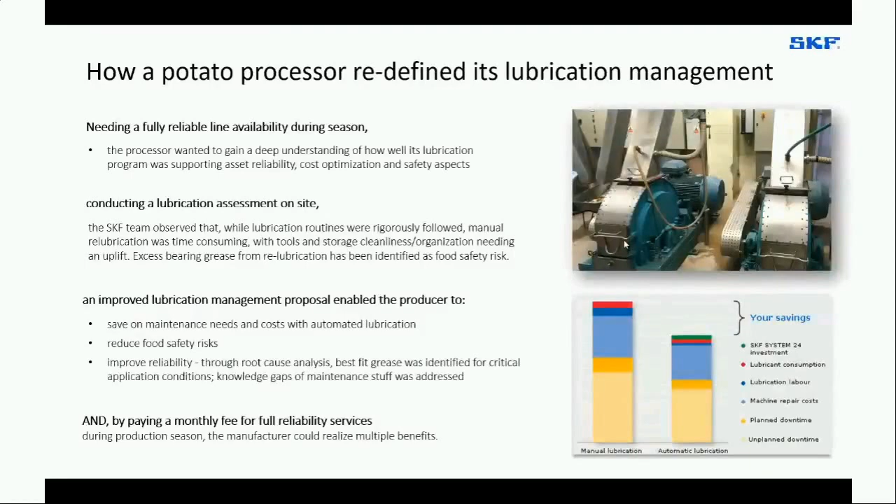So, what is the journey towards performance? What does it look like? Well, it starts with increasing the mean time between failure by the application of technology, by providing design upgrades in machinery, understanding what is required and how to deploy that.

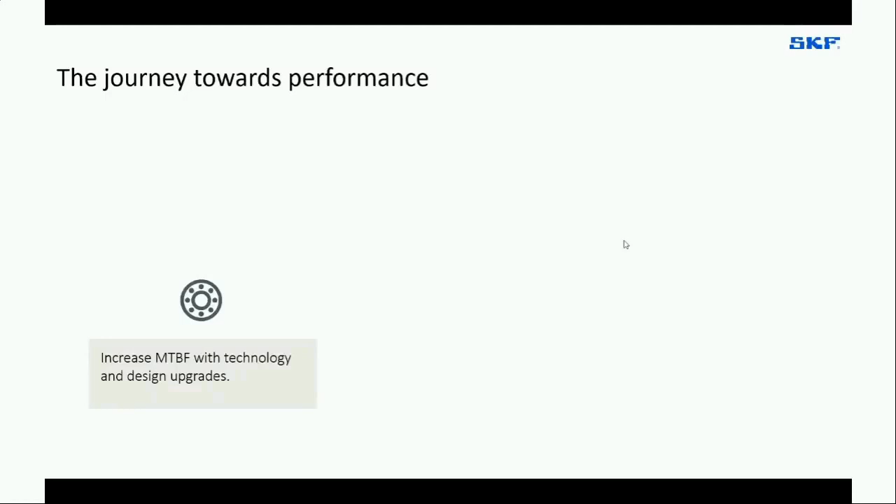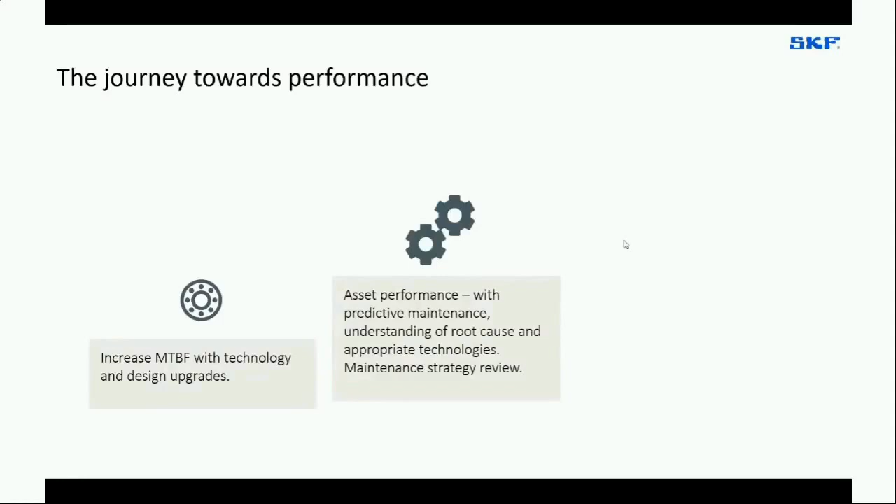Then maybe moving to consider more asset performance, maybe look at predictive maintenance techniques to develop a good understanding of the root cause of failure and what technologies may be appropriate to mitigate or eliminate that, and maybe a maintenance strategy review based upon that asset, or maybe even the line.

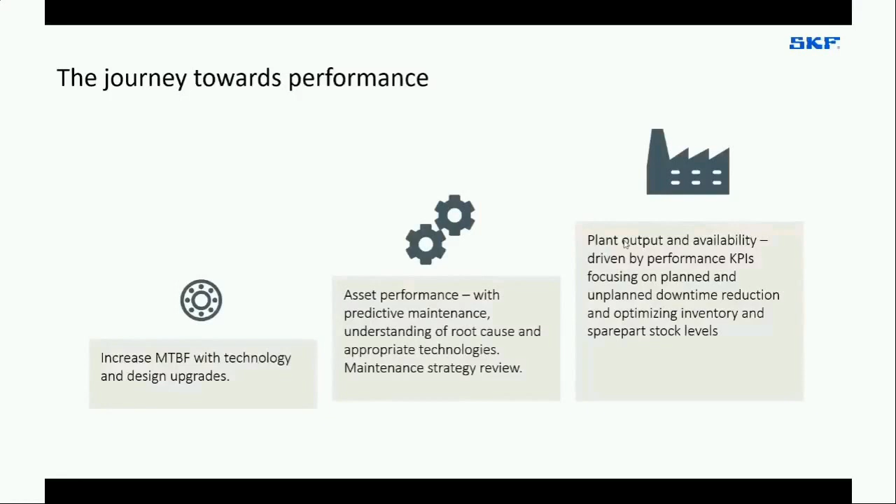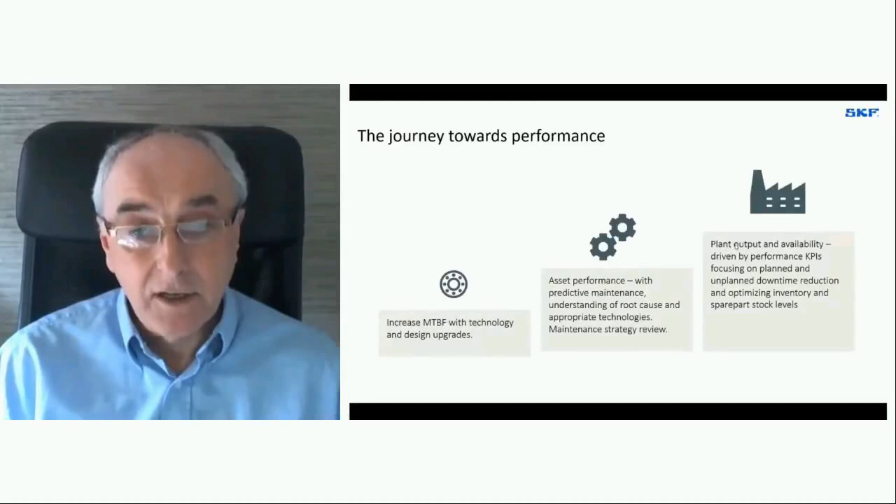And then consider the very much bigger picture: plant output, availability of assets or lines, driven by key performance indicators, by focusing on planned and unplanned downtime reduction. Maybe as well as that, optimizing inventory and spare parts stock levels to support new maintenance strategies. And obviously, lubrication management can be a big part of that as well.